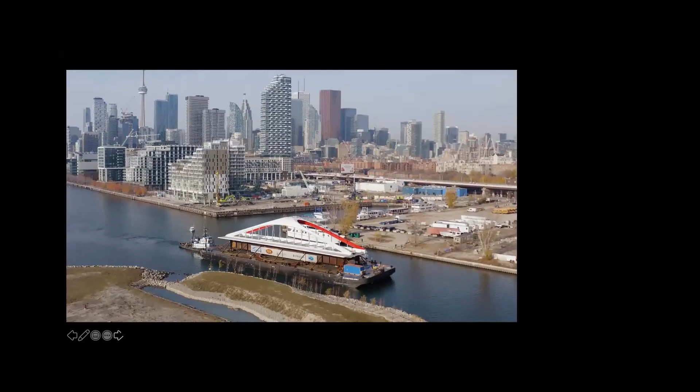Once the new river valley has been completed, we will have—sorry Fitzgerald, maybe we can just put a pause and go back. I know I threw you off there.

So where are we now? Well, we've completed the delivery of the first steel superstructure for the LRT bridge. We're going to focus on that today. The rest of the team is going to touch a little bit on the fabrication, delivery, construction process. But it's important to note, before we get going, just to provide a little context, that the steel superstructure is being fabricated entirely offsite in Dartmouth, Nova Scotia. I'll leave it to Blair to discuss the reasoning behind this decision from the fabricator perspective. But as you can imagine, that brings in itself a whole host of challenges that we had to deal with.

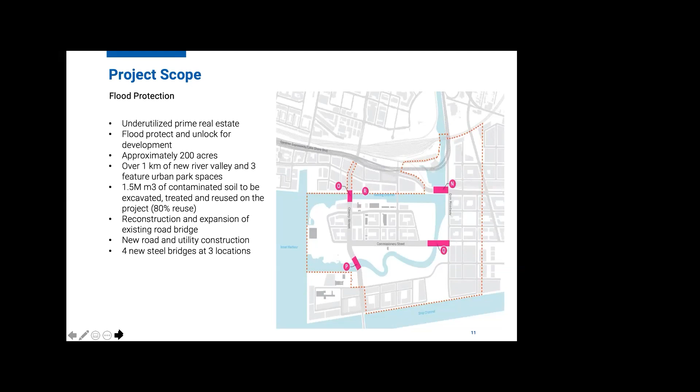So before I hand things over to Mike Machino at Entuitive, I'd like to just show a quick video of the arrival and the installation of the first of the Cherry Street North bridges, because I think it provides an excellent context for the rest of the discussion. Fitzgerald, if you could flip to the next slide and hit the video, and then once the video finishes, we'll turn it over to Mike.

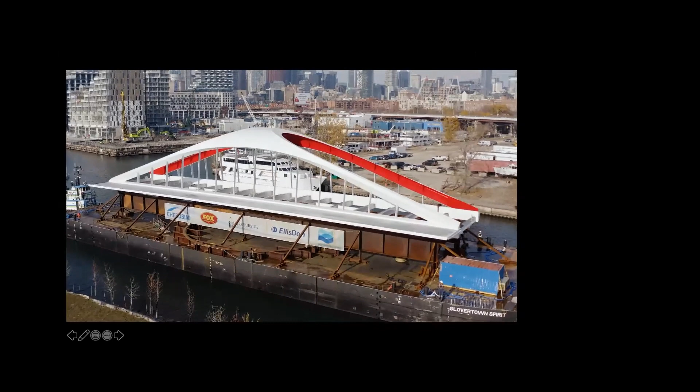So as you can see, the bridge was barged in. We've actually set it from the barge onto its bearings. My fellow presenters will get into this in more detail.

Okay, thanks for that, Matt. So I'm going to take you now through some of the design aspects, particularly how we arrived at the form that we have right now, some of the thinking of the design team.

So when we started the job, Waterfront Toronto gave us the mandate of designing a family of bridges for the city of the future. So what does that mean? Well, the family of bridges relates to the 3 sites. They wanted them all to relate to each other and to frame what is this new community being built out in the Port Lands. And the nature of that community is going to be very modern, high emphasis on technology, a lot of prominence to pedestrians and cyclists, and of course linking to the adjacent park and to the community.

And so with that context, the design team said, okay, let's look at a shell structure. We liked the shell structure because of the simplicity and elegance of the form. The idea was to take that shell and start to remove material that really wasn't primary to the structural force flow—material that was not really necessary to carry the forces of the structure.

And then in addition to that, because it was a shell, we had to pay a lot of attention to the architecturally exposed structural steel quality, because the beauty of the shell comes from the form, the smoothness of the form, the sharpness of the edges. And so with that, we looked at a variety of shell forms, and what you see highlighted there was the form that we eventually settled on.

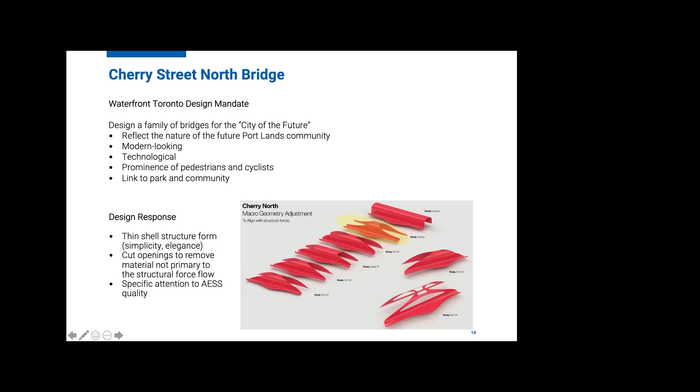So the basic premise was a circular cylindrical shell that would be perforated. The idea was to use laser cutting to put in a series of openings that give it lightness, allow light to penetrate inside, and give it character. But really, when you look at the shell, it's functioning as a traditional arch, where each side forms an arch carrying the forces across the abutments with the tie girder down along the deck level, and the vertical sections generally acting as hangers to hang the deck loads up to the arch.

So we started with that form and then looked at a Voronoi pattern as a starting point. You can see in the red colored image various random patterns, but those openings are tighter in the area where you have the arch forces, to reflect the fact that that's where the main forces are being carried, and therefore we need more material in those locations.

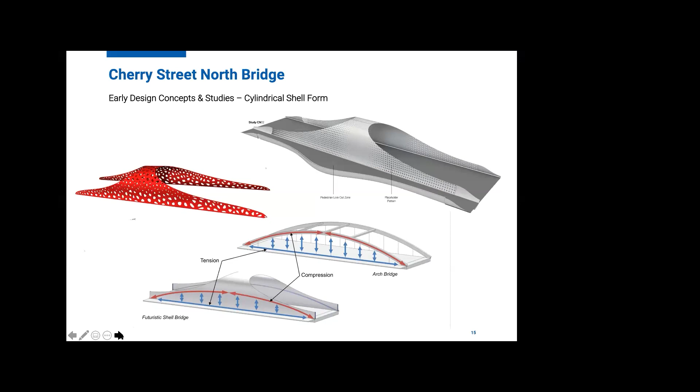So we had a series of meetings with the Waterfront Toronto Design Review Panel, and starting with that form, they encouraged us to make the bridge more transparent, to open it up more to the views of the river and the park and the community. They also suggested that we try to minimize the amount of material to more clearly illustrate the flow of the forces in the structure.

So with that, we went from the random openings of the Voronoi pattern into a more open look where we started to cut away more material and had a series of essentially ribs that were the hangers that hang the forces up from the deck to the arch component of the shell, and retain that center dome section to try to stabilize the two sides of the shell. So it's still that circular form, but in a more open type of view.

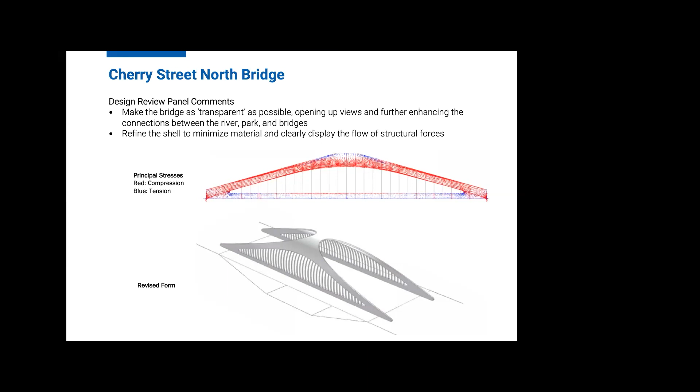So this kind of illustrates the development. We started with that circular, perforated cylindrical shell pattern, and then opened it up a little bit further. We still wanted to make that look even more elegant, so we started to remove even more of the hangers to open it up further, and we started to sculpt the arch sections of the shell to make it a more interesting form.

So if you go to the next slide, please.

The idea was to use strong colors on the interior. Each of the bridge sites will have a different color, so each one has its own character, but at the same time, it really helps to highlight the structural form of the shell, which gives it that unique shape and really brings it to be more prominent.

So with that, I'm going to turn it over now to Jonathan Werner, who will take you through the technical aspects of the design.

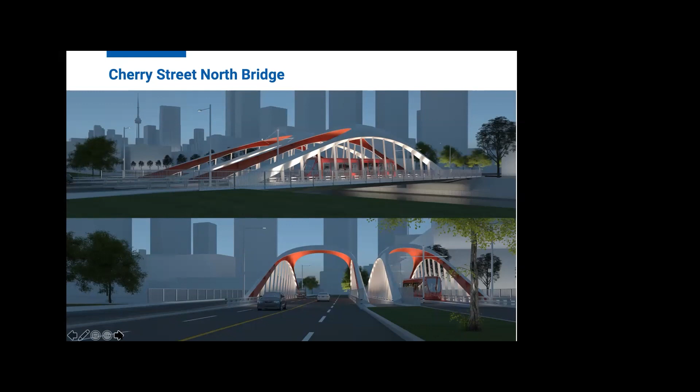Yes, so I'm just going to run through the structural design and some of the dimensions of the bridge. The LRT bridge is the first of the four Portlands bridges, but it's also the smallest, with a span of approximately 56 meters, about 14 meters wide, and an overall height of approximately 10 meters.

It's been designed to function as either a BRT or an LRT bridge, so a bus rapid transit bridge or an LRT bridge. So there's two different loading regimes that we had to design for, including for the LRT, you have to design for an additional concrete overlay on top of the deck.

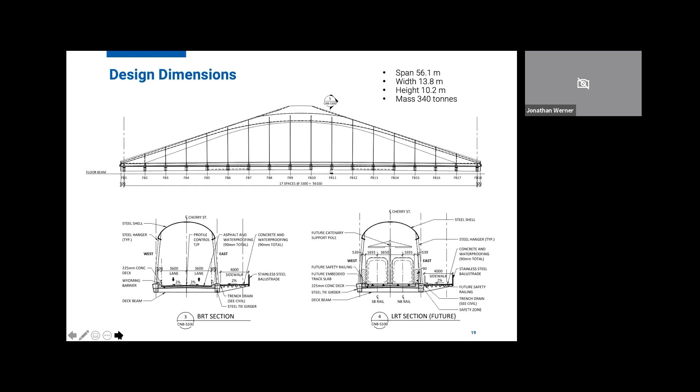The deck beams are variable depth steel I-girder sections with welded studs to make it composite with the poured in place concrete deck. They're variable depth since we account for the cross fall of the deck with the variable height of the deck beams.

The tie girders are closed boxes with vertical internal stiffeners at each deck beam location, which also coincides with the arch hangers. The aesthetic form of the bridge dictated welded constructions, which led to significant fatigue design considerations, especially for the tie girders, which are fracture critical elements.

The arch legs and the shell dome are all open sections constructed of welded steel plates, which have been bent in double curvature.

The cantilevered sidewalks have been designed using an orthotropic steel deck section.

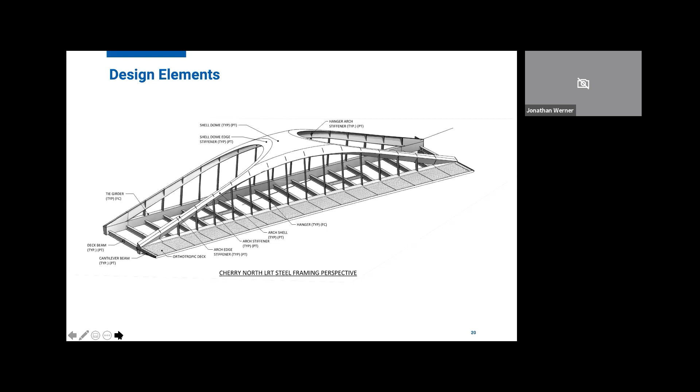As you'll see in the video, the open section and its shape change throughout the arch, so we had to account for that within our analysis.

This required quite a bit of detailed finite element analysis, including considerations of local and plate buckling and member buckling, as well as initial imperfections and section capacity reductions due to residual stresses.

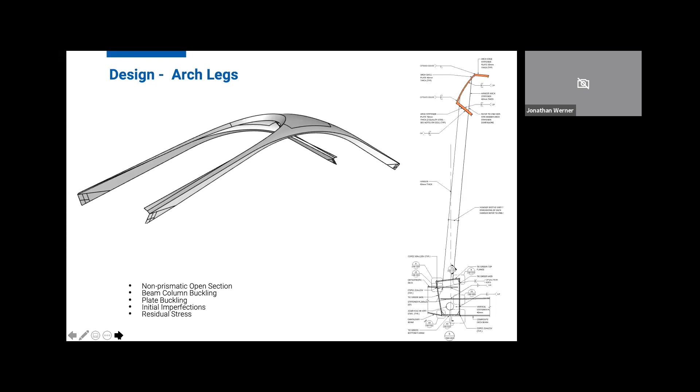The overall form of the arch and the shell elements is difficult to describe in two dimensions and really has to be described in three dimensions. This was done through the creation of a Rhino model, which was the basis of both our design drawings and our analysis.

Meshing these elements directly into SAP was not efficient, so we wrote algorithms in Grasshopper to mesh these elements and then transferred them directly to SAP2000. This allowed for a lot of flexibility since we were able to change parameters in the algorithm to adjust mesh density locally or globally within the model as needed.

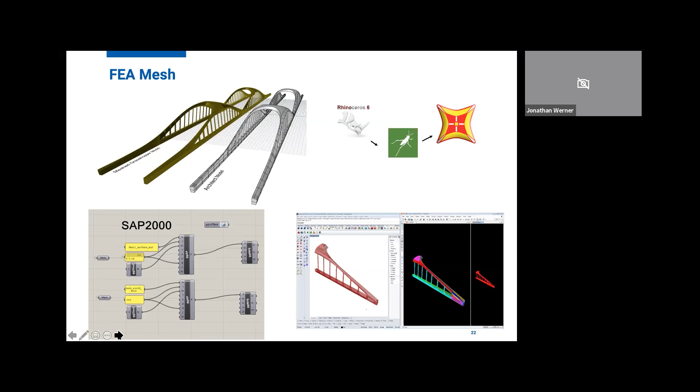The cantilever sidewalks on the bridge are quite wide relative to the deck width, and this is actually one of the narrowest sidewalks—others are even wider. It's also the narrowest deck, though. The reason for this is to accommodate significant public realm aspects of the overall project for pedestrians as well as bicyclists.

To reduce the weight of these sidewalks, it was decided to use an orthotropic steel deck. We do have a concrete or asphalt overlay in some places, depending on whether it's bike or pedestrian access.

To help adjust the variable widths of the sidewalks and to optimize the orthotropic steel deck ribs, we set up a Grasshopper algorithm to give us flexibility to make these adjustments. Let's play the video to show some of that flexibility.

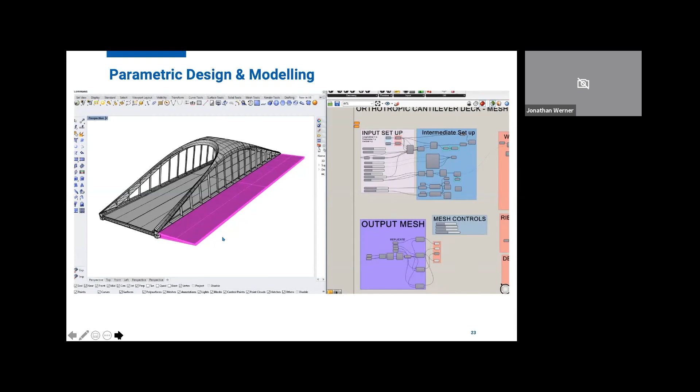We set up a number of parameters—rib heights, rib spacing, length of cantilever—and were able to adjust those and mesh as needed. There were some adjustments during the project to sidewalk widths, and this helped us adjust to that, as well as come up with the best spacing and height for the ribs.

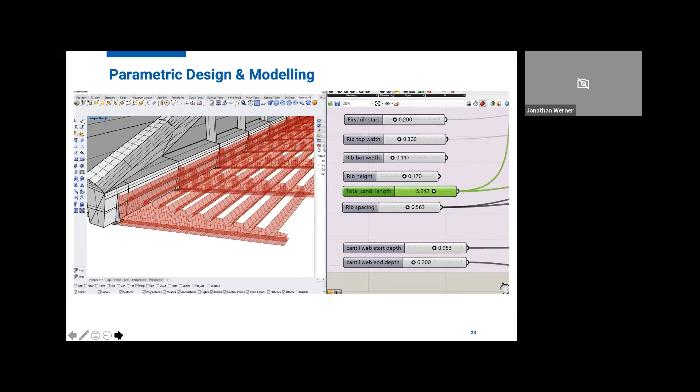Okay, next slide, please.

The hanger welding sequence is something that came up during fabrication. Cherubini noted that welding the initial hangers was fine, but once you welded the next set of hangers, the weld shrinkage would cause the initially welded hangers to go into compression and start to buckle.

In collaboration with Elliston, Cherubini, and Harborside, we met to discuss a variety of options for sequencing this work.

Cherubini also completed a series of weld tests in their shop to measure the approximate weld shrinkage for us to use in our finite element analysis.

One of the chief challenges is that the hangers are actually quite slender, so they have to be kept in either tension or very low compression throughout.

After a lot of brainstorming and FEA analysis, we arrived at a detailed sequence involving simultaneous welding of hangers in groups of up to four, as well as heating of previously welded hangers to protect them from going into compression and buckling.

To measure the strains in the hangers, Harborside also developed and implemented a monitoring plan using strain gauges on the hangers. Blair from Cherubini will discuss the implementation of the sequence in more detail in his portion of the presentation. Next slide, please.

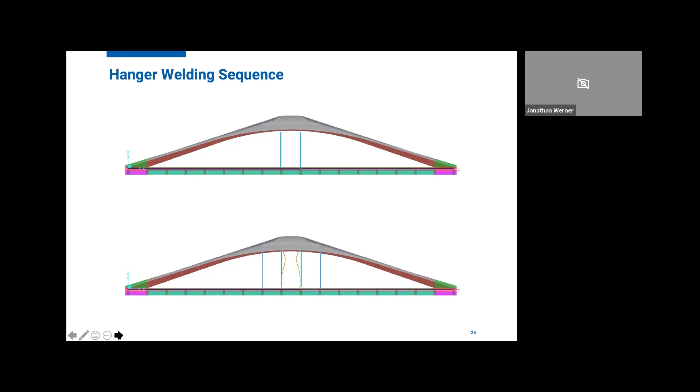As previously mentioned, the architecturally exposed structural steel was an important component of this project. We arrived at AESS 3 for above the deck, which is quite a high level of AESS. This only goes up to 4, with 1 and 2 below, where the elements were of less importance. Above the deck, you're primarily looking at the shell and the arch aspects.

We used CISC guidelines for AESS as part of the contract. Of course, the major challenge of this is achieving the required aesthetic requirements for the AESS with heavy steel welded elements. To help deal with this ahead of time, we added mock-ups into the work.

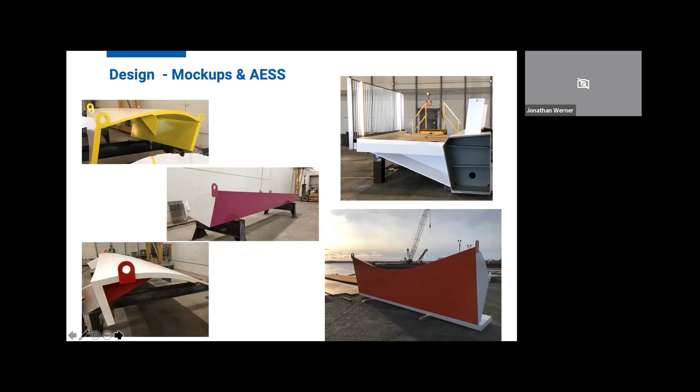My last slide is just to discuss the structural steel coating and durability aspects. In general, we're using the MTO 3-coat system, which is an epoxy, zinc, epoxy, polyurethane coating system - the Acrolon system by Sherwin-Williams. However, for some elements, such as the tie girders and hangers, metallizing was also used as the base coat. This is really to protect these fracture critical and primary tension members that are heavily exposed to chloride spray.

And with that, I will hand off the presentation to Blair, I believe. Thanks, Jonathan.

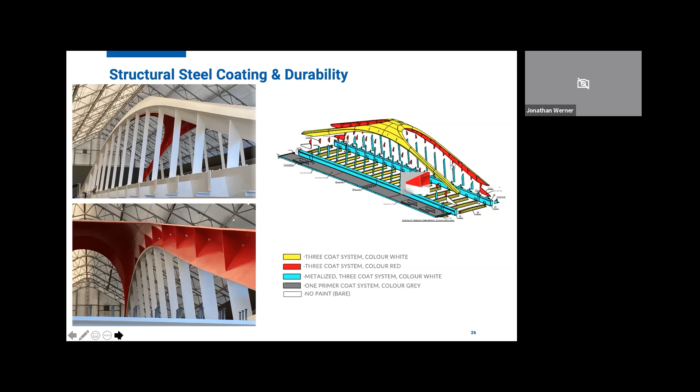We're having a little bit of a storm out here. I've had power flickers that have kicked me off 3 times so far. I've switched over to a hotspot on my cell phone, so hopefully I can get through this here. If not, Robbie, could you carry on for me?

As Jonathan described earlier, when we came to look at this as a fabricator, we broke it down into much the same components as he described: the tie girders, the arches, the domes, the orthotropic sidewalk, and the deck beams. We did that to be able to generate as many different work faces as we could to meet the schedule required for this project.

The challenging part of this project, when we looked at this, was when it went from a circular curved surface, sort of a 1D or 2D curve, to a 3D curve, where you've got steel shaped in 2 directions.

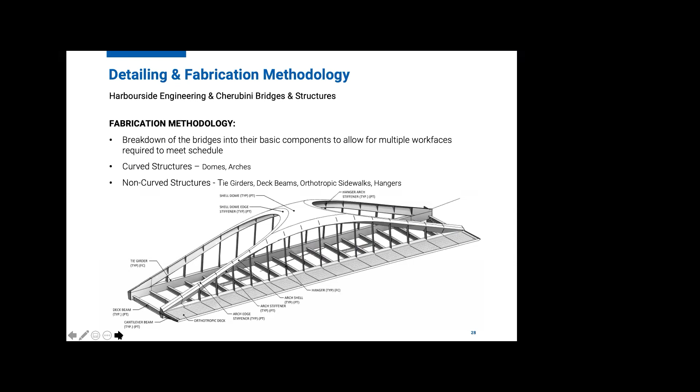This beautiful shape was modeled in 3D, and we had 5 different groups working on this project, with 5 different 3D modeling packages that we were all trying to get to work together. Eventually we arrived at the IFC model to be able to move things fairly effectively from one modeling package to another - not without its challenges, but it seems to work fairly well now.

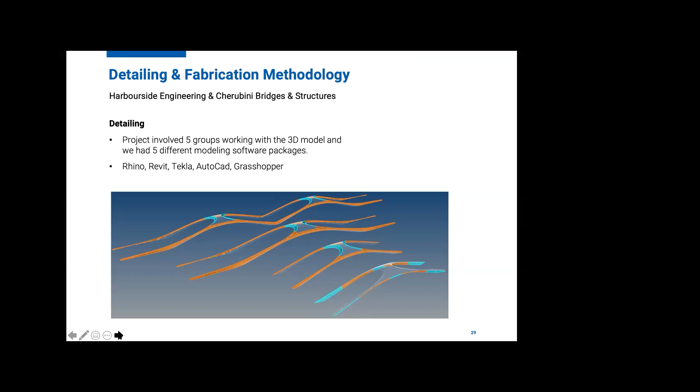The change from a cylindrical curved surface to a 3D curved surface was something that we don't do in-house, the 3D forming. So we actually partnered with a company called CIG Architecture, who spawned from the shipbuilding industry, and they specialize in 3D forming for architectural projects.

You can see that they're forming some fairly heavy plate, maybe not quite as heavy as some of the pieces we have on this project, but with a large press. They're in the Netherlands, but they've done an excellent job.

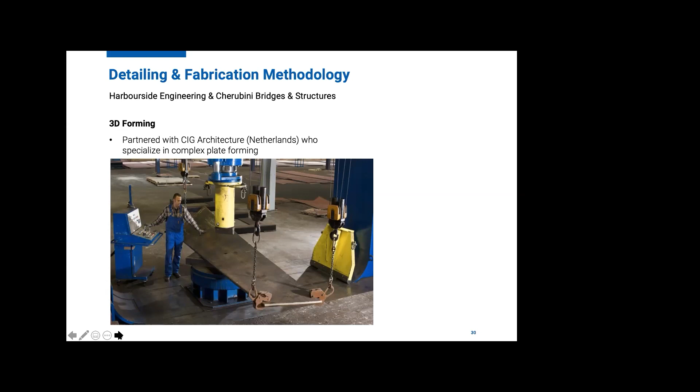As I said, we broke down the project into its segments or components, and you can see in the picture on the left some of the arch legs that have been fit up and are being welded now. We welded with submerged arc to the largest extent possible. There's a lot of heavy full penetration welds. We've got material as thick as 125 millimeters on this job, but the arches and domes are up to 80 millimeters.

Depositing metal quickly, evenly, and in a controlled manner is really important, and subarc gives us that control. You can see in the picture on the right-hand side, it's the dome that's been fit together and welded, and it's upside down. We chose to do it in the upside down position because the AESS requirements on this project meant all the welds on that dome and the arches needed to be ground smooth, and we wanted to eliminate any overhead grinding. So we welded it and ground the inside of that dome in that position upside down, and then we'd flip it and finish the grinding on the outside of the dome afterwards.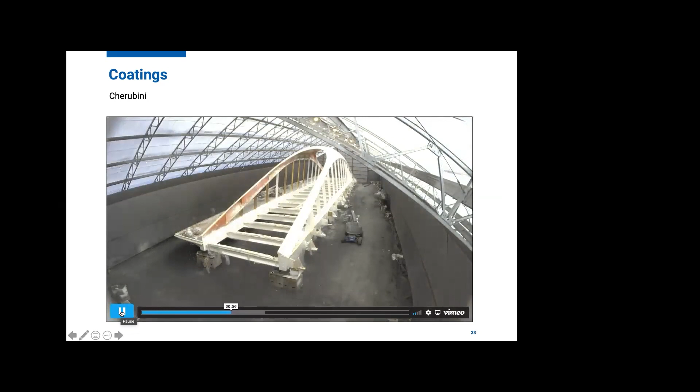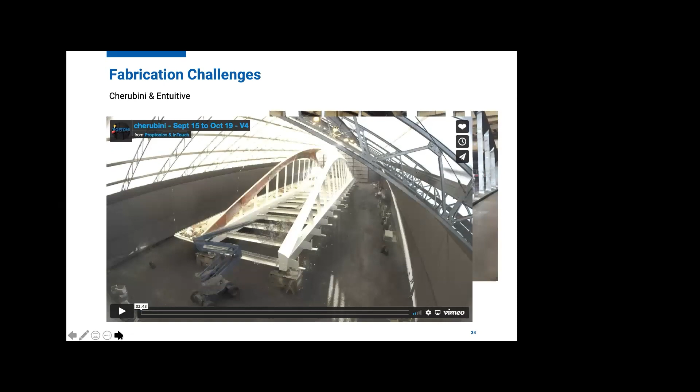Perfect, thank you. You can go to the next slide. I wish the painting process went that fast.

Jonathan talked about the challenge we had with the distortion we initially saw in the hangers, the buckling of the hangers. So the problem, you'd weld, say, a pair of hangers, and then when you went to weld the adjacent ones, when those welds cooled, they would shrink and put the ones you had previously welded into compression.

As I said, we worked out, between the whole team, a sequence of welding. We would weld 4 hangers simultaneously, the 4 middle hangers simultaneously. We had welders set up, starting and stopping passes at exactly the same time, flipping side to side on the weld at the same time, just to make sure we were balancing the forces in that weld. And we were carefully controlling the preheat.

Then when we would move to the next set of hangers, outside of the 4 we had just welded, we would actually preheat the 4 that had been welded to grow them the same amount that the ones we were currently welding would shrink, so that when everything cooled, they would shrink the same amount, resulting in maintaining tension or very, very low compression in those hangers. So it was an interesting challenge, and it's working very well.

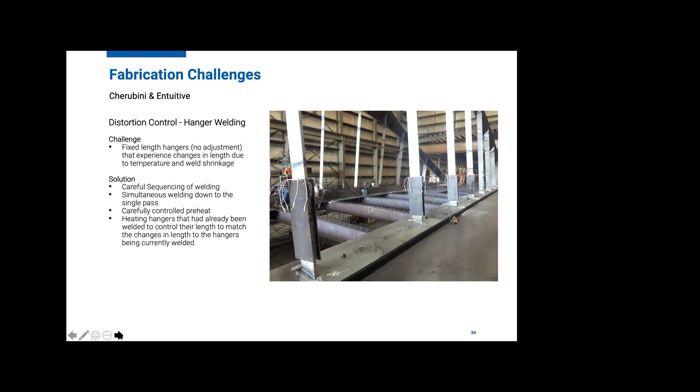One of the other interesting aspects of this was putting together the dome. I showed some of the forming that CIG was doing, and they've done an excellent job making these pieces so they fit nicely. You can imagine if they weren't done well, how much trouble you'd have fitting these together, but they did a great job.

With the dome, with the mold frame you see in the top right-hand corner, we're able to set all the plates in and tack them together, working progressively from the middle out, just to make sure everything fits together nicely. And then carefully sequencing our welding and back gouging and monitoring the dome shape, with total station equipment.

Just to know if things are starting to pull one way or another, and then adjusting the welding as you go, sometimes having to reposition a piece just to make sure that by the time you make it out to the ends where the arches connect, everything's in the right location. It's a kind of careful balancing act, but it seems to be working quite well. Not without its challenges, though.

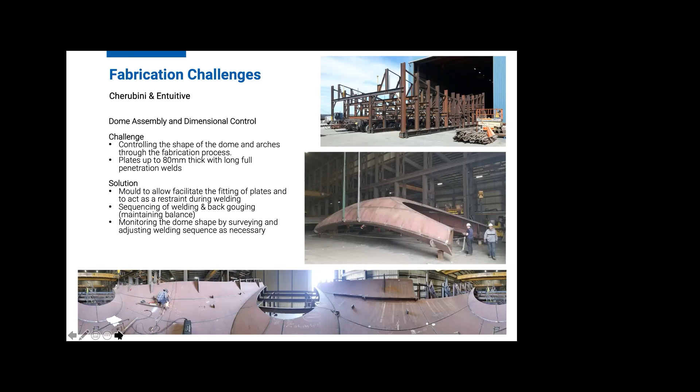Just a quick note on the AESS, the architecturally exposed structural steel, and trying to conceal all the welds and having all these 3D curve shapes meeting. We learned a fair bit about what makes it easier, what makes it really difficult to do that.

Definitely the fit up is key, and you would rather have a high section that could be ground rather than creating a low that has to be filled and then ground. Usually that has to be blended out a long, long way, where a high can be concealed by grinding fairly easily. The other thing is having nice, consistent welds, like you can see in that top middle picture there, which gives you a better chance to grind uniformly to conceal that weld.

The other two things are being careful not to overgrind, because that shows up, sticks out like a sore thumb once you get some paint on it. Eliminating the overhead grinding, which we did on the domes, and then actually right down to training on grinding techniques and proper ergonomics, because we have people doing this grinding, running a 7-inch grinder for 8 hours a day. So proper technique, micro breaks, proper positioning, all that are absolutely important to keep those people healthy.

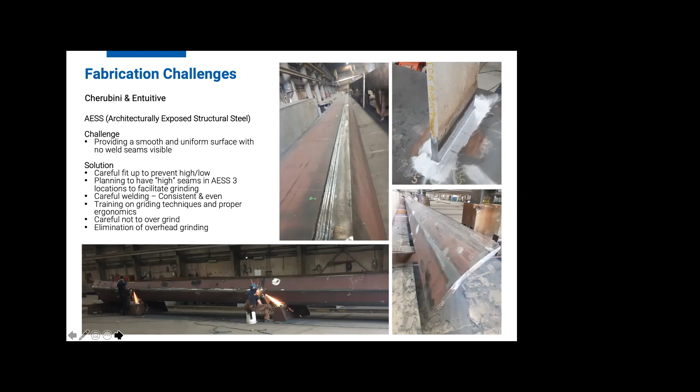So I'll turn it over to Robbie here. Thanks, Blair. Yeah, we are having a good nor'easter here in Nova Scotia. So if you hear the wind blowing, I'm not outside, I swear, I'm in my house.

We'll go through the installation. Harborside were tasked with doing all the temporary works in the shop, all the frames that Blair showed, all the geometry control. What I'm going to go through here is our process of moving the structure around the yard, in and out of the paint shed, getting it ready for loading on the barge, and all the temporary works involved for the barge transport and the erection on site in Toronto.

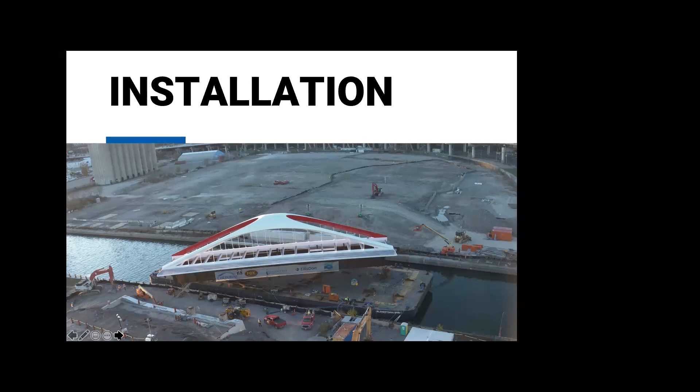Next slide. So first, going through all the temporary works we had to use.

The first thing you can see is 2 plate girders that are not nicely painted below the structure. We called those the transfer beams, and they're tied together with diaphragms at intermediate points. Those transfer beams are really necessary because we are going to spin the structure 90 degrees to the barge when we get to Toronto, because the barge can't fit in the Keating Channel except parallel to the channel axes. We need to spin the barge 90 degrees to get it parallel to its span. That ends up being, with the barge width and the ability to spin it, about a 17-meter cantilever from the end of the arch structure, where its bearing points are, to the center of what we call the turntable on the barge.

We looked at beefing up the tension ties to accommodate this, but it just didn't make sense from a design perspective, and the inertia and amount of steel we needed to do that. Coupled with that, this process is being used for both Cherry Street North bridges, the LRT bridge and the heavier vehicular bridge set to be erected at the end of 2021. So from an efficiency point of view, it made sense to create that out of temporary steel rather than beefing up 4 sets of tension ties to handle the erection conditions as well as the in-service conditions.

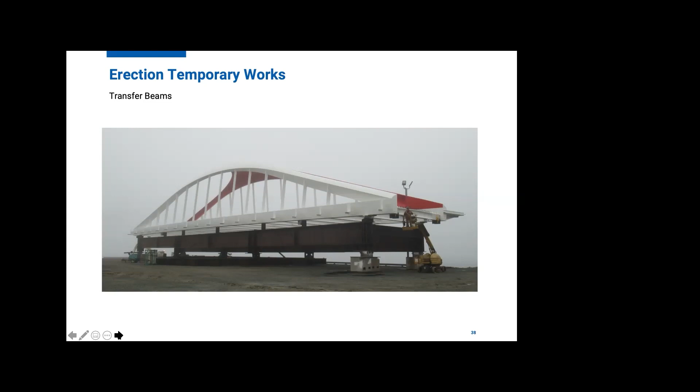What that does is multifold. First, we have two very flexible plate girders that are not tied together with in-plan bracing, to try and minimize things to deal with on site and to minimize weight as well. So instead, even though the transfer beams are supporting the arch superstructure from a gravity perspective, laterally -- to avoid lateral torsional buckling and to laterally support the compression flange of the transfer girders -- the bumpers act through the steel superstructure. The steel superstructure is actually supporting the transfer beams below laterally.

Also at the load points, whether it be SPMTs during the loading process onto the barge, or during the turning operation, all wind loads are taken out through these bumpers and back down through the supports -- whether those supports be on the turntable, or as I mentioned before the SPMTs during loading of the barge, or during barge transport where we have end blocking at the ends of the structure.

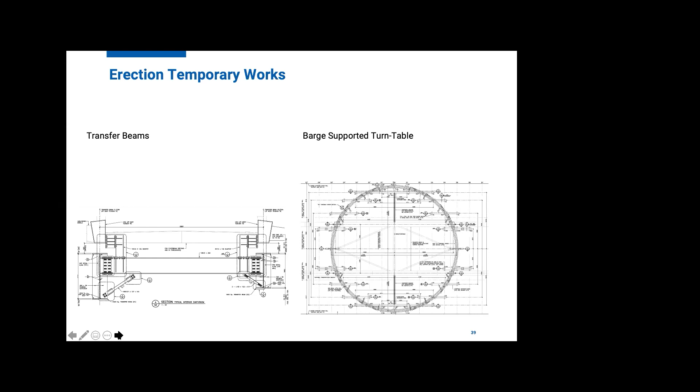So we are dealing with loads on the order of 346 tons for the superstructure. The vehicular one, the heavier one it's actually designed for, is going to be 450 metric tons. The transfer beams weigh about 164 tons, and the turntable is another 68 tons. The turntable diameter, as you can see, is almost the width of the barge -- just over 22 meters in diameter.

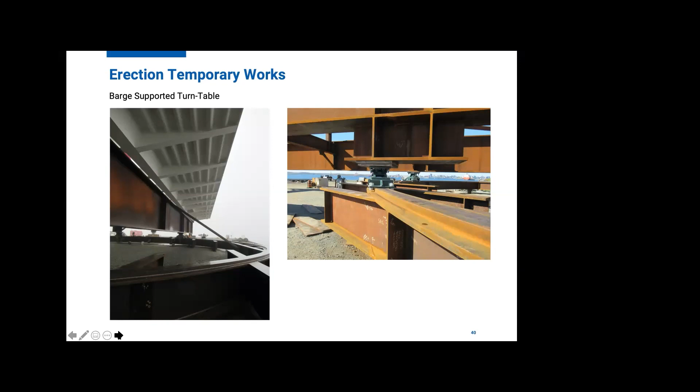Then when we get to Toronto, we jack at the end blocking conditions. You can see the stiffener to the left-hand side of the stool. We jack there, kick the stool out, transfer the loads to the turntable, and then we're in the right condition then to spin the structure parallel to its span and just hovering over its permanent foundations.

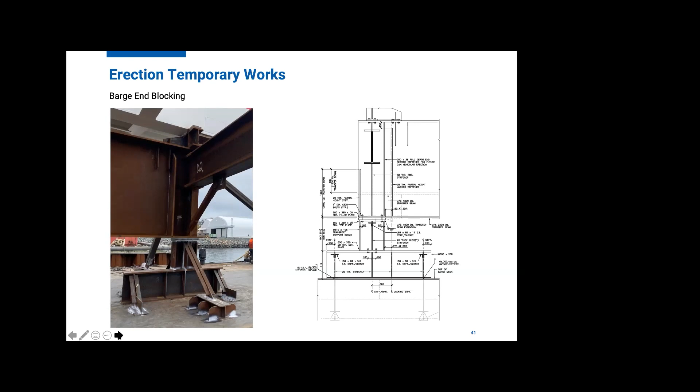Because Cherubini's quayside facility in Dartmouth is on the Halifax Harbor, and we have to deal with tides, and we also have to deal with the articulations or slope transitions coming off the approaches onto the jump bridge and then onto the barge, which also has, as the load comes on, it lists and it basically changes its freeboard and draft. Hence, we call this a dynamic loading operation.

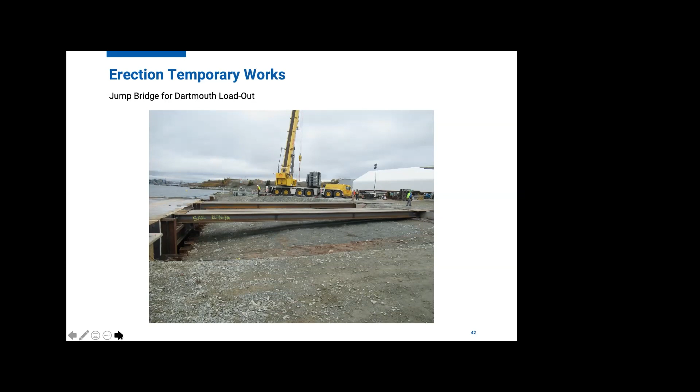We had to design a jump bridge. Now, the jump bridge was mainly to mitigate the transition angles and to deal with tidal conditions in the Halifax Harbor during the loading process, but it was also to mitigate or reduce lateral surcharging effects on Cherubini's existing quayside wharf structure. Next slide.

So once we had it loaded, you can see on the barge, you can see in the foreground the transfer beams supporting the steel superstructure above, and then transferring this load directly down to the end blocking on the barge. Also, you can see in the middle the turntable, so that when we get to Toronto and jack from the end blocking, lower down, deal with the cantilever deflections. Then we transfer the load to the turntable to facilitate the spinning of the structure relative to the barge.

We also see all the bracing around, and that is based on a sea lashing to keep the structure stable on the barge during designed storm conditions during transport of the barge from Dartmouth, Nova Scotia to Toronto Harbor. Next slide, please.

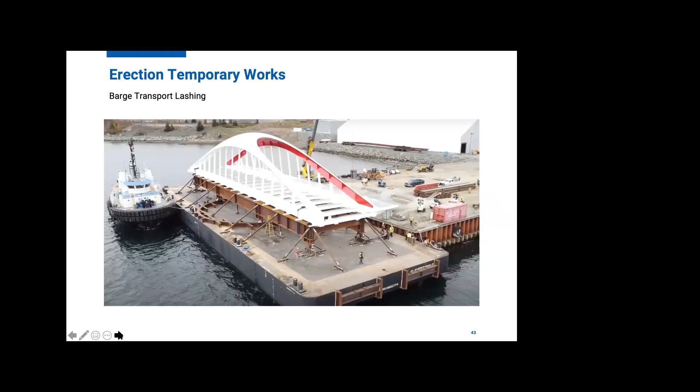This is the last piece of temporary works, and then we'll get into the meat of going through the transport and erection procedure. These are the erection temporary jack down frames that are located on the permanent abutments.

There's 4 frames total, 2 on each abutment, that when the structure gets to Toronto, is spun 90 degrees, so it's hovering over its permanent supports. The barge is ballasted as much as we can.

The barge is ballasted to a freeboard of 3 foot 3 inches. That's the minimum legal freeboard we can handle. At that point, the structure is still elevated over the beam seats, or the final elevation of the structure, by approximately 6 feet.

So a jack down procedure from underneath with jacking and blocking didn't make sense. So we designed erection jack down frames that were hanger assemblies to allow us, with hollow core jacks and restroking areas, to allow us to rapidly and in a controlled manner jack the structure down onto the permanent bearings at the end of the erection procedure.

Now, one thing that came up is that the bearings, the permanent pot bearings, because of COVID, were late getting to site. In fact, they were almost 2 months later than when the erection was completed. That, coupled with the fact that we didn't want to leave the structure on the jack down frame hanger assemblies for 2 months because they could only handle certain storm events, we decided...

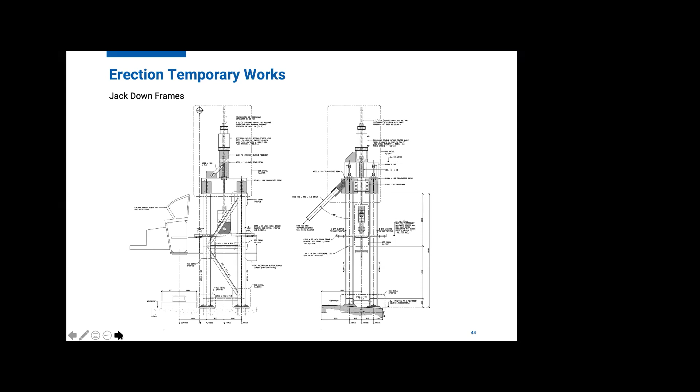You'll see in the pictures, we decided to use temporary bearing blocks to set the structure on, concrete blocks and steel plates above, and then put the hanger frames in, pick it up off the blocks, take the blocks out longitudinally onto the approaches, and then lower it onto the bearings when the bearings came. That all stemmed from some delays in getting the bearings that was blamed on the current pandemic.

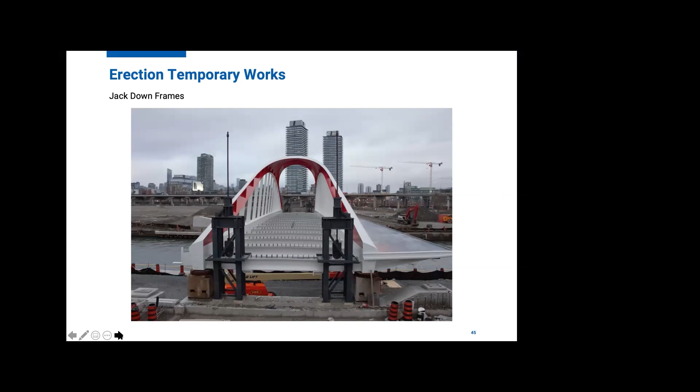Then the SPMTs go out in the yard, go underneath the transfer beams that were blocked temporarily in the yard, and pick up the transfer beams and the turntable that is temporarily strapped for transport to the underside of the transfer beams.

Then with the transfer beams and turntable supported by the SPMTs, the cranes, R&D cranes, which is also owned by Cherubini Metalworks, 4 cranes were put, 1 in each corner, to pick up the superstructure to allow us to slide the SPMTs and transfer beams underneath the structure and then lower it under control onto its support positions on the top of the transfer beams.

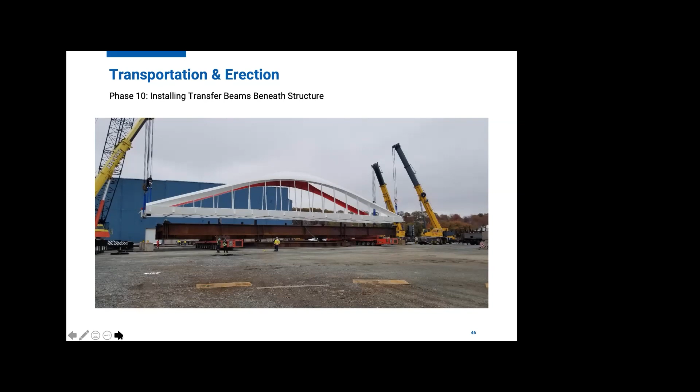With that in place, we were ready then to take the transporters and this superstructure and the transfer beams and the turntable over to the jump bridge to start loading over the jump bridge and onto the barge. Next slide, please.

So here you can see it with the SPMTs supporting the transfer beams and the transfer beams in kind supporting the steel superstructure above and the turntable below, transitioning over the jump bridge assembly.

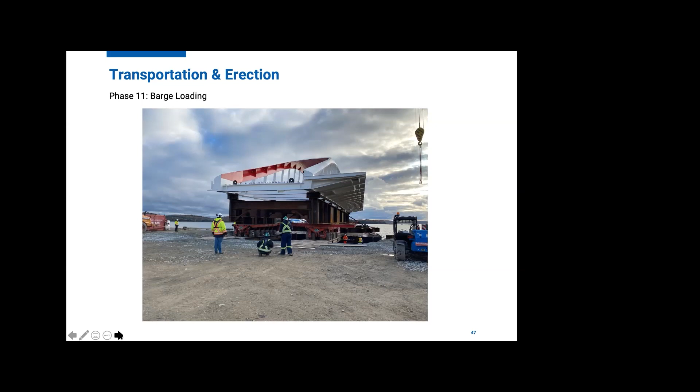Next slide. This is near the end of the SPMT loading of the structure onto the barge, so it's getting into position relative to the end blocks. The end blocks are slid into place, and then the SPMTs are stroked down with their hydraulic capabilities to transfer the load from the SPMTs to the end blocking.

The stern end SPMTs were then able to get off the barge basically with the reverse route that it took to load the barge over the jump bridge. The SPMTs on the bow end of the barge were removed later when the barge was turned 90 degrees relative to Cherubini's wharf to install the sea lashing, and they were removed off the barge with Cherubini's cranes.

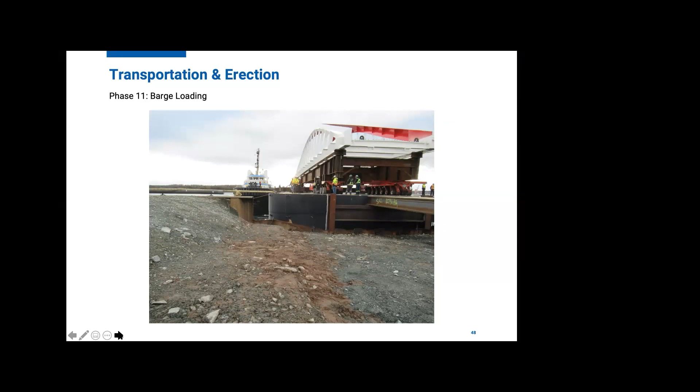Next slide. So here's another picture just when the leading SPMTs are reaching the stern of the barge. Under that load condition, the barge listed about 2.5 feet, so the draft increased at the stern end by about 2.5 feet relative to the bow end.

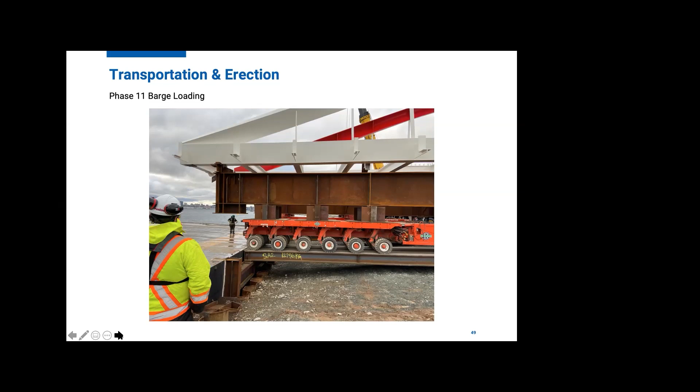So it just tells you the degree of load and the amount of influence that had on the loading of the barge and making sure that the transition angles and the tides were right to allow the SPMTs to transfer the load across the approaches, over the jump bridge, and onto the barge structure. Next slide.

Here we are with the barge turned 90 degrees, with all the SPMTs removed, and we're getting ready here, doing the final touches of putting the sea lashing in place in preparation for the voyage to Toronto Harbor.

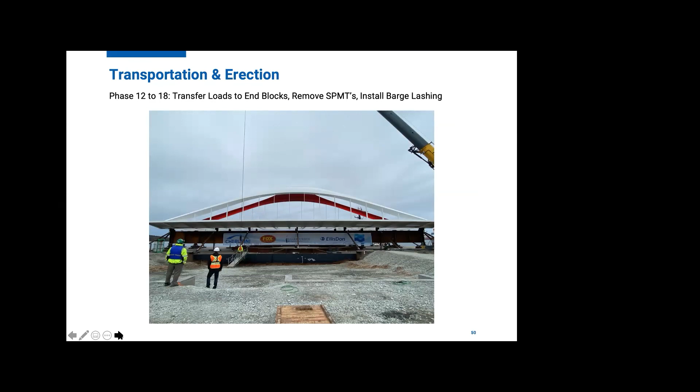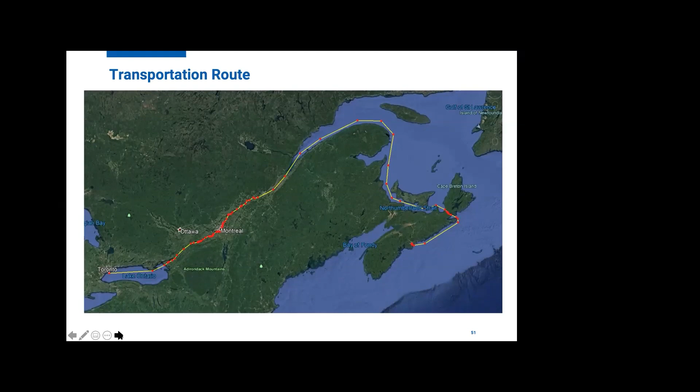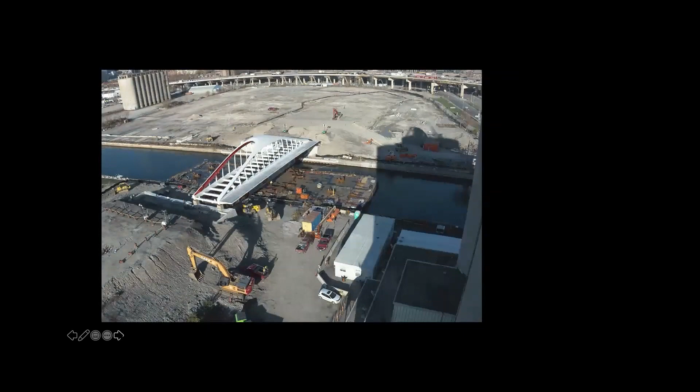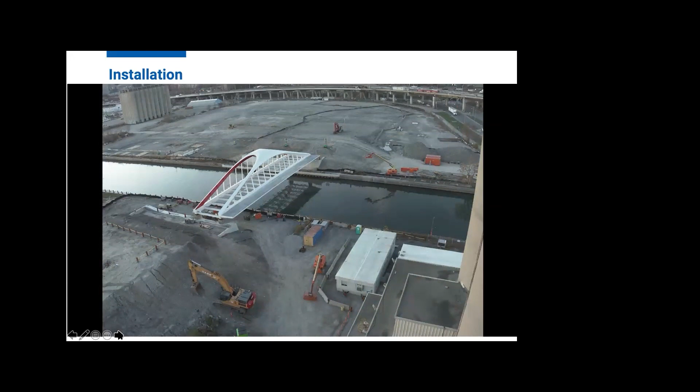So here's a video of when the barge gets to the Keating Channel. We transferred the loads from the end blocks, then spun the bridge 90 degrees, which took about 20 minutes on the turntable. We ballasted the barge to transfer the loads from the barge to the end blocking, then spun the transfer beams back 90 degrees to be parallel to the barge, and removed the barge from the site. That's how you see the structure today, except with the hanger frames now in place at each end, in preparation to remove the temporary bearing blocks and lower the structure down onto the permanent bearings. You can also see to the east where the adjacent vehicular bridge is going to be erected later in 2021, in effectively the same manner as the LRT bridge was completed.

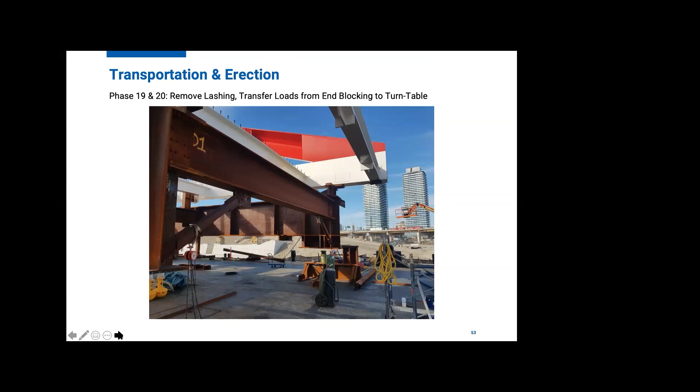So we'll just go through this quickly. The first thing when we got to the Keating Channel in the final position was to remove all the sea lashing. Then we put jacks under the jacking points at the end blocks, jacked the structure up, removed the end blocks on top of the end supports, the barge supports, and then lowered it to allow it to transfer from a simple span supported at the ends to a cantilevered structure supported at the turntable roller positions.

So here you can see the structure completely supported on the turntable, which is again supported on the barge deck, and we're in the process of spinning the structure 90 degrees to be hovering over the permanent abutments. The spinning process was done with bulldozers on site and wire rope leads, and took very little load because we had new Hillman rollers, with friction on those rollers seen to be less than 1%. So it was very easy to spin the structure into place, done in about 20 minutes from start to finish.

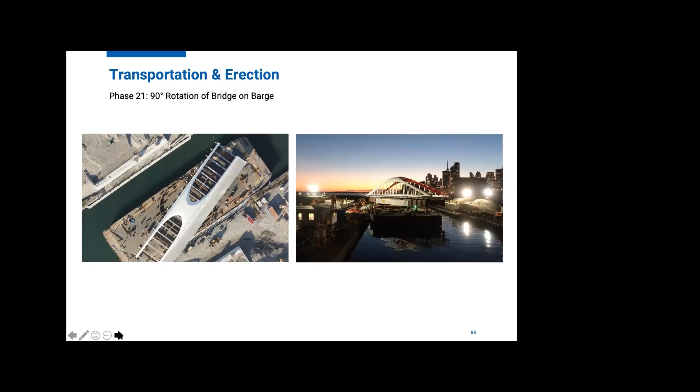So here are another couple pictures of the rotation of the bridge 90 degrees relative to the barge, and you can see the lead line in the right-hand picture of the dozer wire rope line used to spin the structure. We had 4 dozers. Some of the bulldozers were there also to provide temporary mooring lines, mooring points to the barge in the Keating Channel. We used diagonal dozers first, with the first 2 opposite-corner dozers for the first 17 degrees of the spin, then switched to the alternate 2 dozers to complete the 90-degree rotation.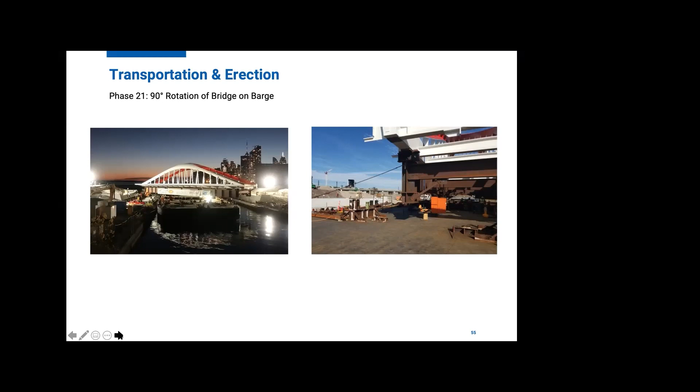There's the bridge in the final position, with the barge ballasted as low as it can go, but still supported on the transfer beam. So we're just lowering it a little bit more to transfer the load from the barge and transfer beams to the temporary end blocks.

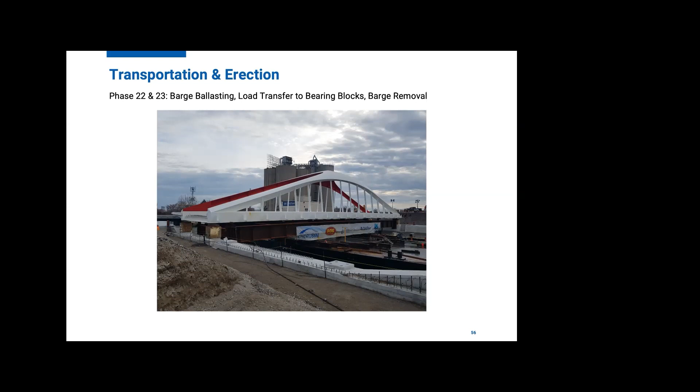Here we are with the load fully transferred to the end blocks now, so there's no more load on the transfer beams. The bumpers mentioned earlier in the presentation have been removed, and the transfer beams have been rotated back 90 degrees relative to the structure, parallel to the barge, in preparation for the barge to leave the site and go back to Dartmouth, Nova Scotia.

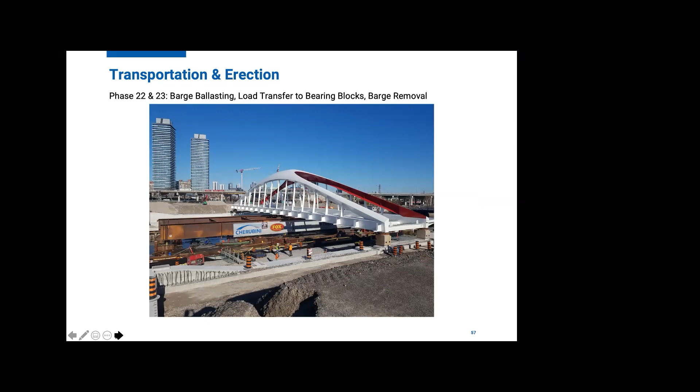And there you have it, just before the barge leaves the site, the bridge on the temporary end blocks.

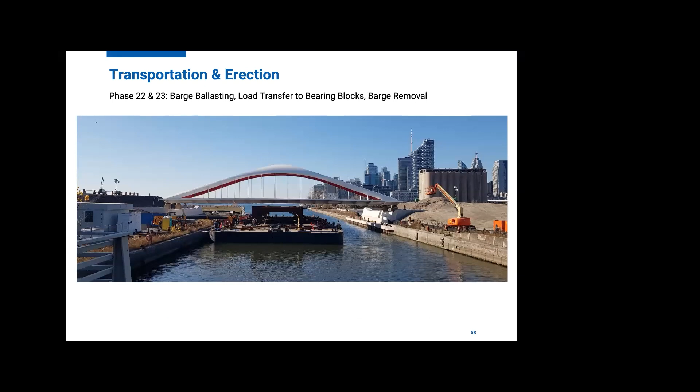As mentioned before, the jack-down frames are now installed, and we're scheduled next week to jack the structure up, remove the load from the temporary bearing blocks, remove the bearing blocks, and then, under control and in a level manner, lower the structure using the hanger frames onto the permanent bearings.